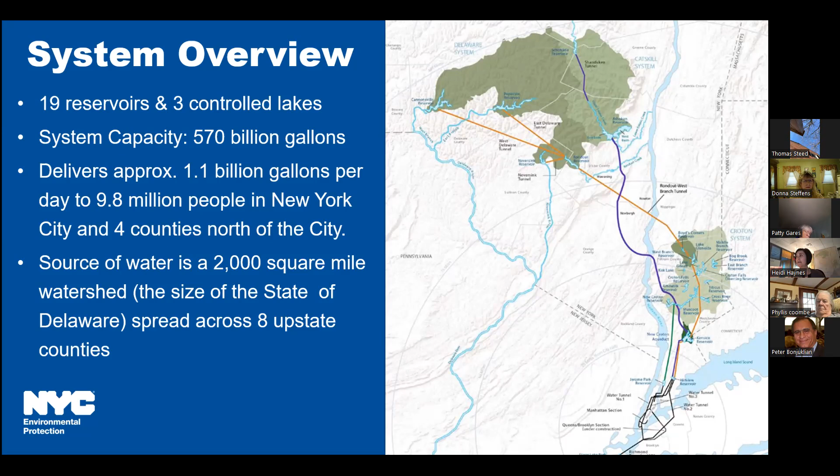The Delaware Aqueduct, which is what we're going to discuss today, is 85 miles long. It runs from the Rondout Reservoir all the way down to Hillview Reservoir in Yonkers. It is the longest tunnel in the world. It conveys about 50% of New York City's drinking water.

The Delaware Aqueduct was put into service in 1944, and it was last fully drained and inspected between 1957 and 1958. So it's been a really long time since it's been taken out of service. And obviously, it's a critical system component. It consists of 3 different segments.

So can everyone see my cursor here? I'm pretty sure you can. The Rondout, so we have the Rondout to West Branch. Don't see your screen, Heidi. You don't see my screen? No. Donna, are you able to see it? It says I'm sharing. Yes, I can see your screen. Sorry to bother you. No worries.

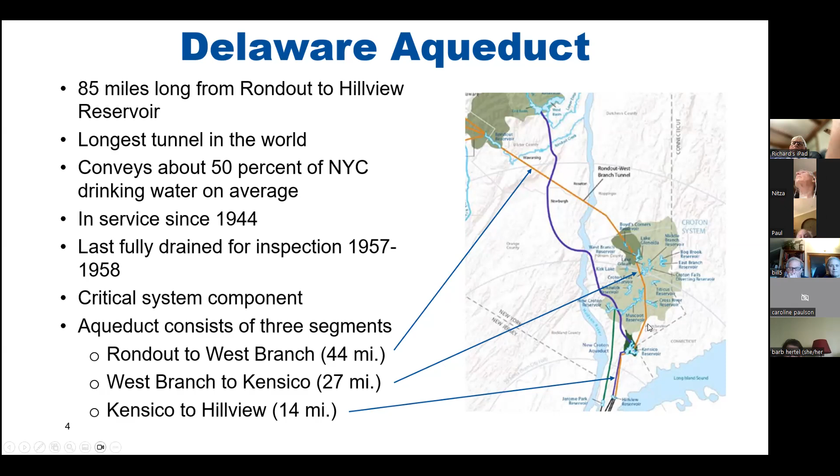Okay, so we have the Rondout to West Branch segment. Then we have the West Branch, sorry, there's a train here, West Branch to Kensico, and then the Kensico to Hillview. So there's 3 different segments to the system.

Back in the early 1990s, Central Hudson discovered a bubbling surface expression near their site along the Hudson River. There was also another leak identified in 1992 in the town of Wawarsing in Ulster County. Between both the leaks, it is estimated that approximately 30 million gallons of water is leaking out of the tunnel per day. That number is dependent on what the flow is going through the tunnel. So the more water we're pushing through the tunnel, the higher the leak is going to be. The less flow through the tunnel, the less the leak is going to be.

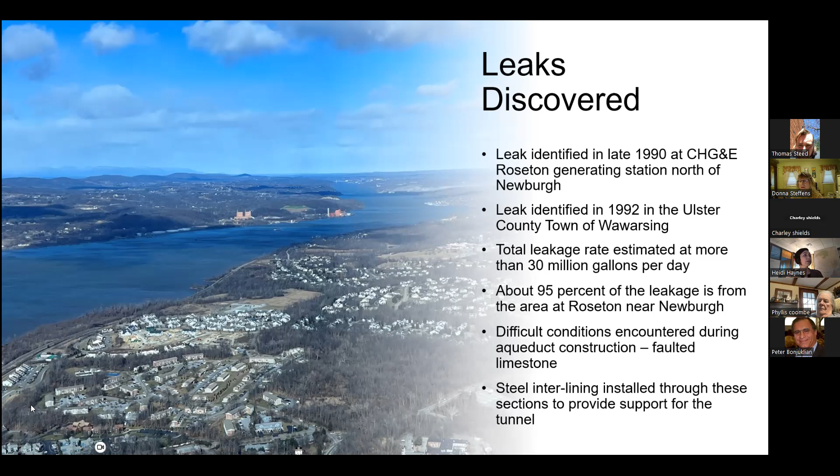Approximately 95% of the leak is in the area of Roseton and Newburgh. The leak in Wawarsing is much smaller, and it's clearly taken DEP a very long time to get to this point, and we'll get to discussing that reason in a little bit. Let me just go back here.

So the reason for the leak itself was that when we first put in the Delaware Aqueduct back in the 1940s, we hit limestone. But the limestone was already a known issue. There's a steel interlining that was installed in part of the aqueduct, but we didn't extend it far enough. So when we got down there to that Hudson River section, it's said that it's a result of a shortage of steel due to World War II. So the portion that goes under the Hudson did not have a steel lining.

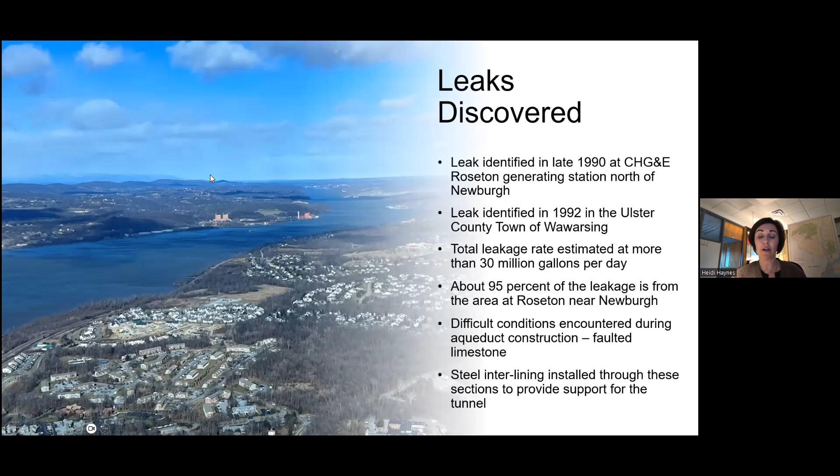So apparently, where we didn't extend it far enough, the limestone has started to erode the concrete, which caused the leaking in the aqueduct. The steel interlining is also going to play another component, a very critical component, as we install the new tunnel.

And so this slide shows all of the areas of concern that we're going to be discussing. As you can see, the leak in Wawarsing, as well as the section under the Hudson River here. This is where we've installed the new bypass line down there in the Roseton area. And this is where the surface expression was originally identified.

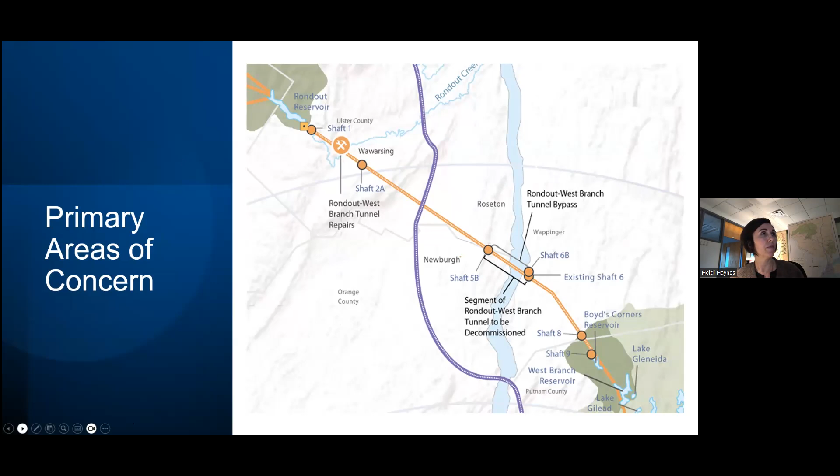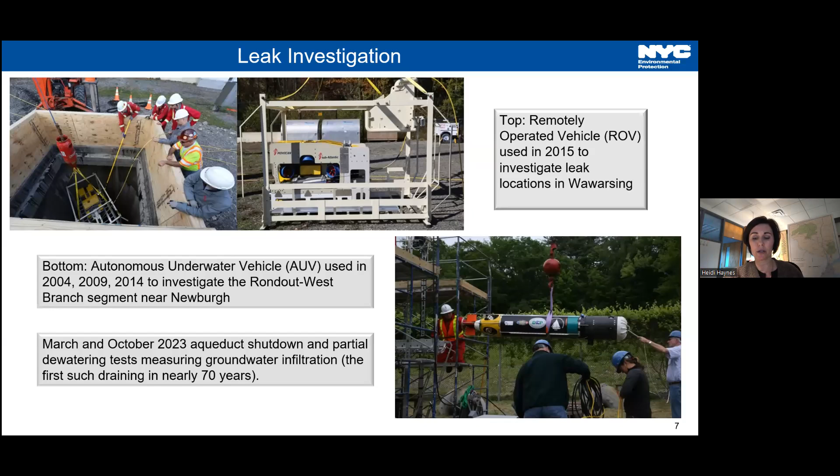So we've done an extensive investigation. These pictures are from the early 2000s through 2015. And although work was done prior to these photos, I just chose these because there are some good pictures. All right. That shows some of the work we've already done.

So what we did was we used ROVs and AUVs that look like mini torpedoes that have cameras on them. So these devices, we dropped them down into the shafts, down into the aqueduct while the water was still flowing. And we were able to take some really good 360-degree views just to see where the leak was and potentially how bad it was leaking.

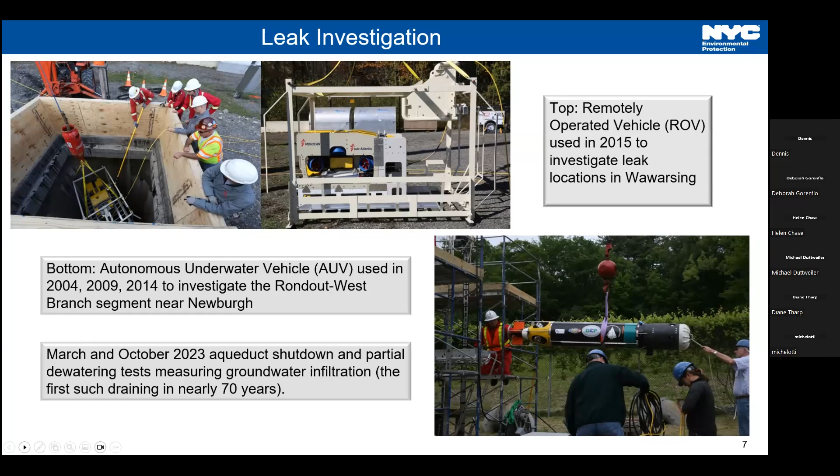So here we are with the solution. How do you fix this? So there were a lot of suggested solutions and a lot of investigative work that went into this. But ultimately, what was settled on was that we needed to put in a new bypass tunnel. The leak in Wawarsing wasn't as bad as the section that's underneath the Hudson.

When we shut down the aqueduct portion that's going under the Hudson, the leak in Wawarsing is going to be fixed at that time, and that leak only requires some grouting. It doesn't require replacement or anything like that. It's just some grout work to repair that leak.

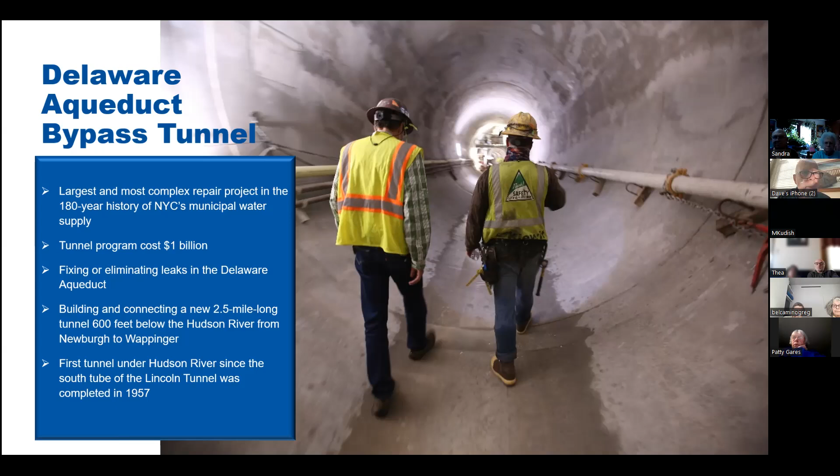This slide shows things in a little more detail. So like I said, the actual bypass tunnel is complete. We've already bored it. The shorter connections on each end need to be finished, and that's what needs to be completed.

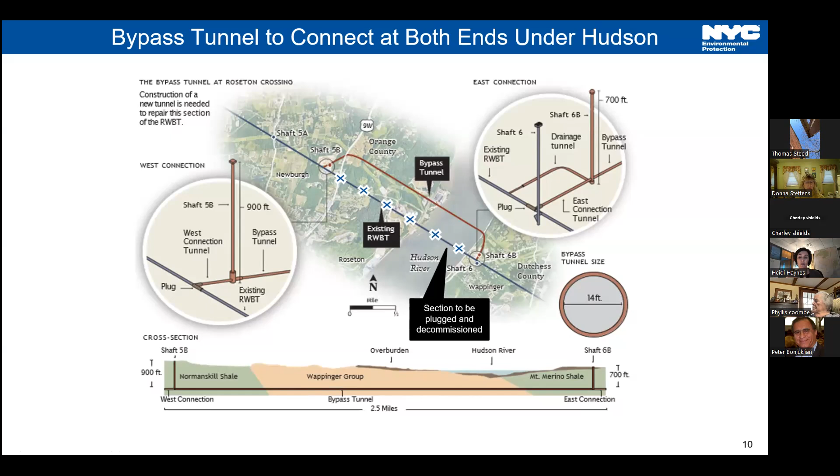The original section of the aqueduct needs to be taken out of service, so it cannot be running, and the pressure needs to be taken off that old aqueduct section, the whole aqueduct, as it's a pressure tunnel. In order for us to bore through it and make those final little elbow connections, the aqueduct has to be shut down. And currently our contractors are estimating for them to complete the work between 5 and 8 months.

The repairs were mostly complete in 2021, and now we're ready to make those two little final connections, and that final decision will come in June of this year. Once we make the decision to shut down, we will have to dewater and take the pressure off of the tunnel. We will attach those two other sections, and while it's shut down, we'll also be doing the grouting work in Wawarsing. We'll fix that leak there. And again, this is anticipated to take between 5 and 8 months.

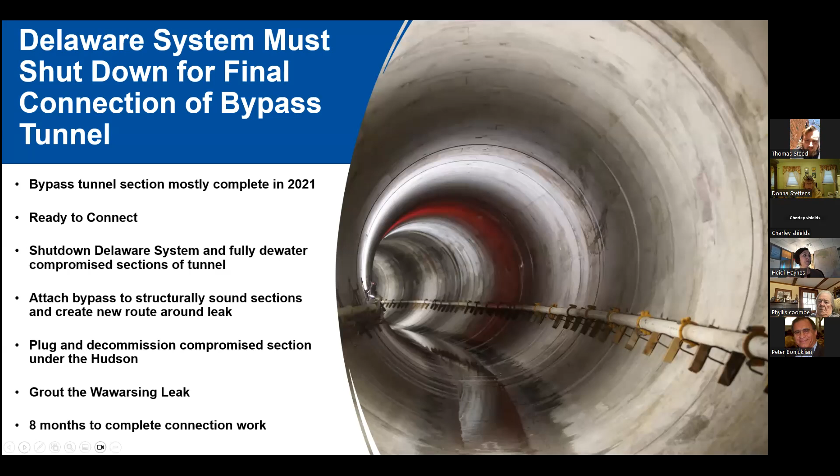So how did we get to today? The system's water supply management plan during the shutdown operations has been nearly 20 years in the making. There have been a lot of conservation measures implemented in this city to promote lower demand, lower usage of water, so that we can use the other two parts of the system, the Catskill and the Croton system, to meet the demand during the shutdown. There's many precursor capital projects that needed completion, including a $200 million repair and rehabilitation of the Catskill Aqueduct.

We also have our community customer water supplies. So there's a lot of people who rely on the water besides New York City. Anywhere that we have infrastructure in the counties besides Dutchess County, by law, those communities are allowed to tap into the New York system and buy water from us at a wholesale rate. If we shut down the Delaware Aqueduct and it's those communities' primary water source, we need to make sure that those communities can still get water for the 5 to 8 month period.

So there's been a lot of work that's gone into making sure that they're ready for the shutdown. We placed hundreds of interconnected and satellite-linked ground movement monitors at primary leak sites, and we were monitoring residential wells that could potentially be impacted by leak-influenced aquifers in Newburgh.

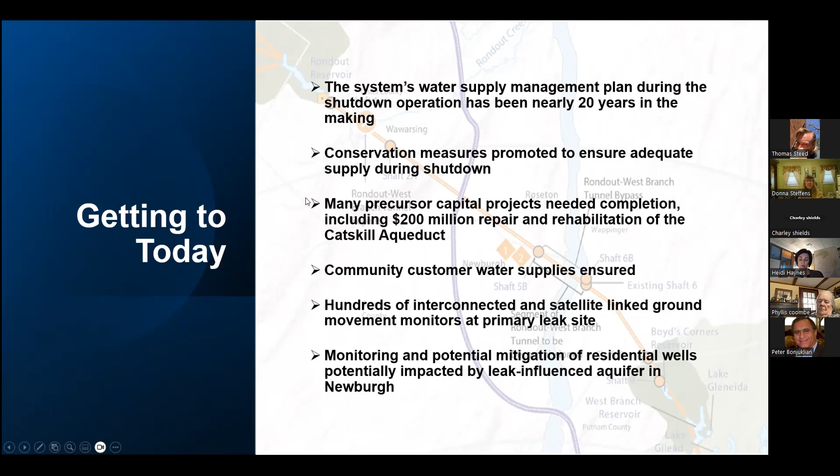I also just want to make sure that everyone is aware that there was a shutdown management plan that was subject to a full environmental review pursuant to the State Environmental Quality Review Act and the SEQR process, which also included a public process. That was included in all of the plans and all of the designs and operations going into this.

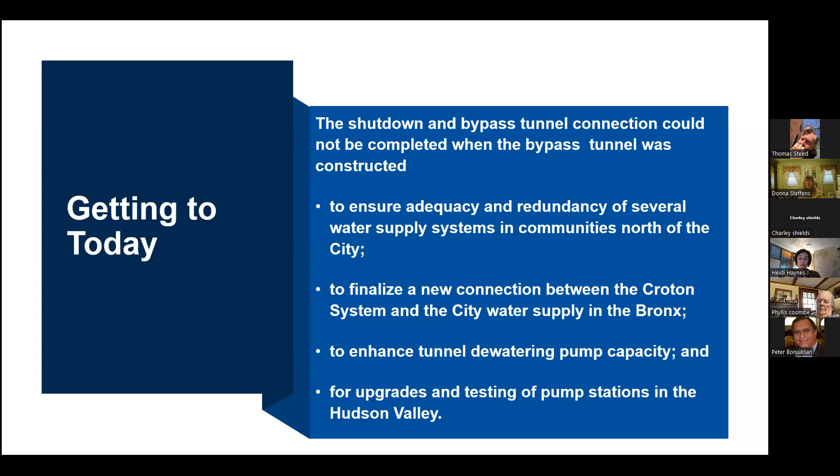Getting to today. The shutdown and bypass tunnel connection could not be completed when the tunnel was constructed, and it was delayed in '22, '23, and is scheduled for October 1st this year. It is to ensure adequacy and redundancy of supplies for the communities north of the city, and to finalize a new connection between the Croton system and the city water supply system in the Bronx. We also had to do some upgrading to our pumping stations in the Hudson Valley, at Croton Falls and Cross River.

So this is a list of all of the names of the projects that needed to be completed before we were able to do the shutdown. These are all capital construction projects, which entail contracts and a very long bureaucratic process that facilitates them. I'm not going to go through all of the projects, but just know that there's been a lot of work that's gone into the last 20 years. We haven't just been sitting idly by waiting to get this done. A lot of work has already been completed. That $1 billion number does not include the money that went into all of these precursory projects.

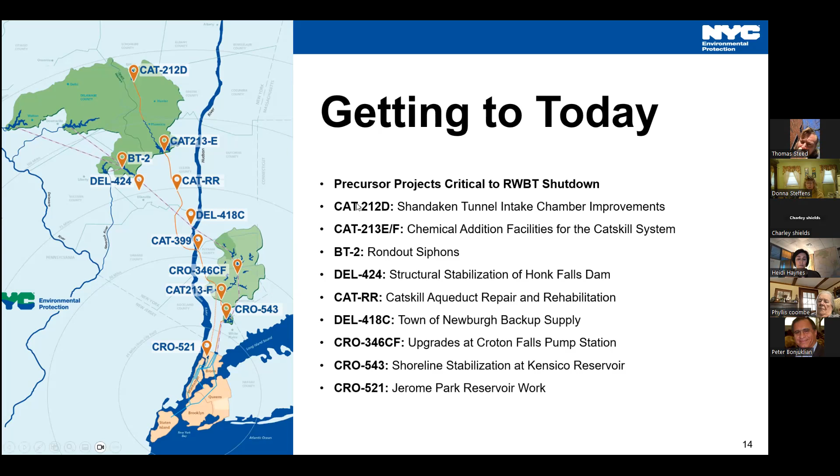Again, the shutdown management plan was a very extensive process. It took us a few years to complete. We had to do investigations to figure out where the leaks were coming from. We had to come up with a solution on how to design a new tunnel. We had to do the designs for it. We had to go through the SEQR process. Then we had to figure out how we were going to operate the system while we were shut down.

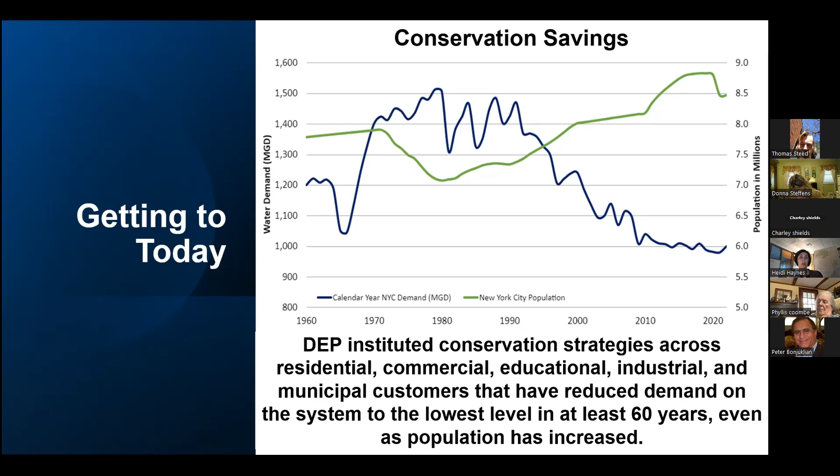Let's look into how operations are going to be with the shutdown management plan. The purpose behind the shutdown management plan was to provide the operations of the system. However, during the shutdown itself, the goal is to provide uninterrupted, high-quality water to DEP's customers. I understand that north of the city, there are concerns that include flooding and fisheries, and we'll get to some of those concerns as well.

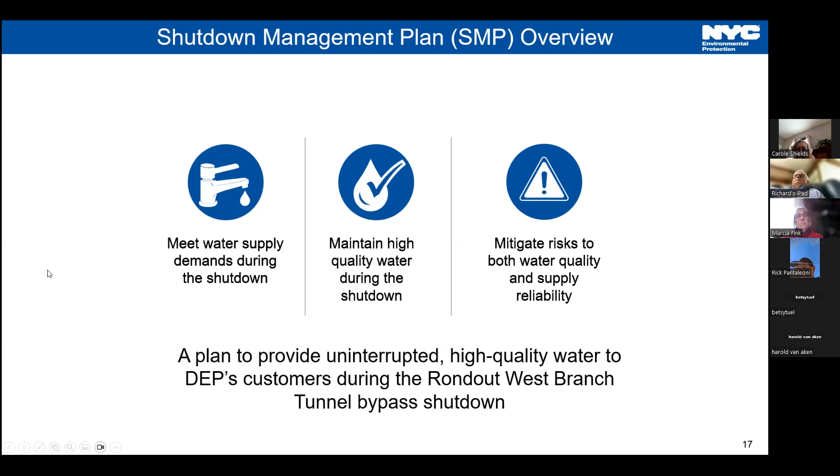This is the water supply augmentation. I think one of the biggest questions is that if we're going to take the Delaware Aqueduct out of service, how does New York City plan to get its water for 5 to 8 months while half of the supply is out? So we did a big project called the CAT R&R to rehabilitate the Catskill Aqueduct to restore service. This included sending people into the aqueduct with squeegees to remove biofilm off the walls of the aqueduct to improve capacity. We anticipate 600 million gallons per day out of the Catskill system.

We've done several max flow tests, and we feel we can increase that flow if needed. The 2 pumping stations at Cross River and Croton Falls are part of the Croton system. Since the Delaware system is going to be removed from service between the Rondout West Branch section, there remains a branch that will go from West Branch to Kensico. These 2 pumping stations have the ability to take Croton water and pump it into the Delaware Aqueduct below the West Branch and send it into Kensico.

This allows us to take more water out of the Croton system than we normally have. These 2 pumping stations have always existed as part of our drought management plan for years. They got big upgrades leading to this shutdown. This was one of the predecessor projects, and this was necessary so that we could maximize the use of the Croton system. The Croton filtration plant is up and running, and it can maximize out at about 290 million gallons per day. We are expecting to utilize that during the shutdown.

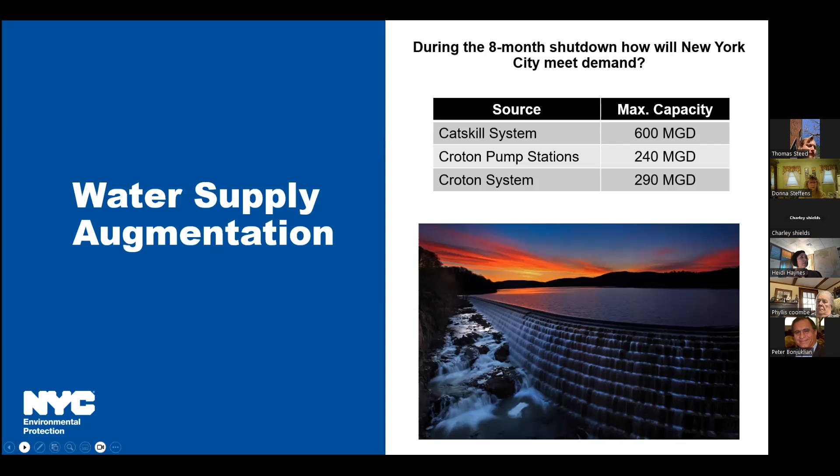So now we're getting to the point once again where we're gearing up to make a decision to move forward with the shutdown. We need to be able to tell our contractors, yes, gear up and mobilize everybody, get them to the site. Let's get prepped and ready to go for October 1st. So what is going to lead us to making that decision? Water supply hydrologic conditions, infrastructure conditions, and having everything in working order.

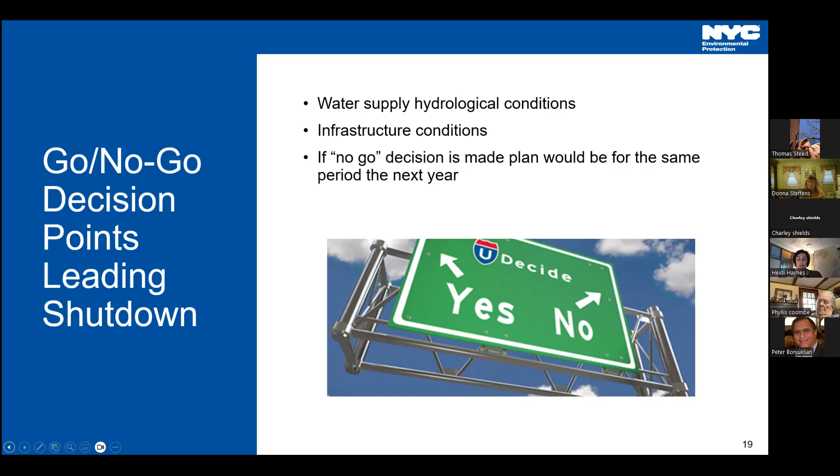If, for whatever reason, we are not seeing those things come together, the decision will be no-go for this year, and the shutdown will be delayed once again to the same time frame next year. The reason for the October to May time frame is that it's the lowest demand period in the winter time, whereas in the summertime, the demand for water is much higher.

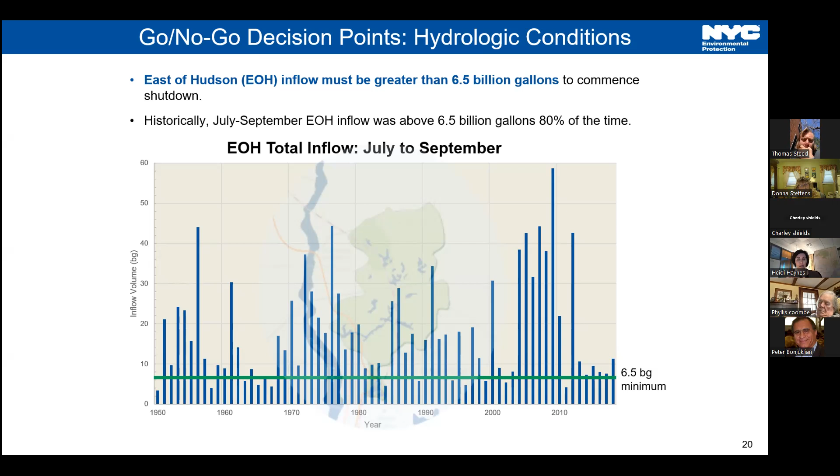So this slide, I understand, has some predictions from 2023. I'm only using this slide as an example, and as we go forward, this information will upgrade. We use a lot of tools in this process. Weather forecasting, we take a look at it long-term, short-term, seasonally, and annually. There are a lot of different intervals in these products and in what they put out. Our partners at the National Weather Service in NOAA.

We will continue to utilize these tools as we do for our normal daily operations. We will be bringing in more forecasting tools. We've brought them in over the last year, and we're also using IBM Weather Underground. Columbia University is also helping us with weather prediction so that we have more tools in our toolkit, even more than ever before. We've been testing them out over the past few years to see how well they can interpret information that is going to be used for the operations.

I know that one of the biggest questions you have is, what if something happens during the shutdown? That question is really dependent on where we are in the process. There are different phases of construction that will hit during the shutdown. We will be having a meeting every single day, every morning, probably at 8 a.m., just like we've done for all of the predecessor projects, explaining what the conditions are and whether we are still a go, no-go, and what our current bailout time is.

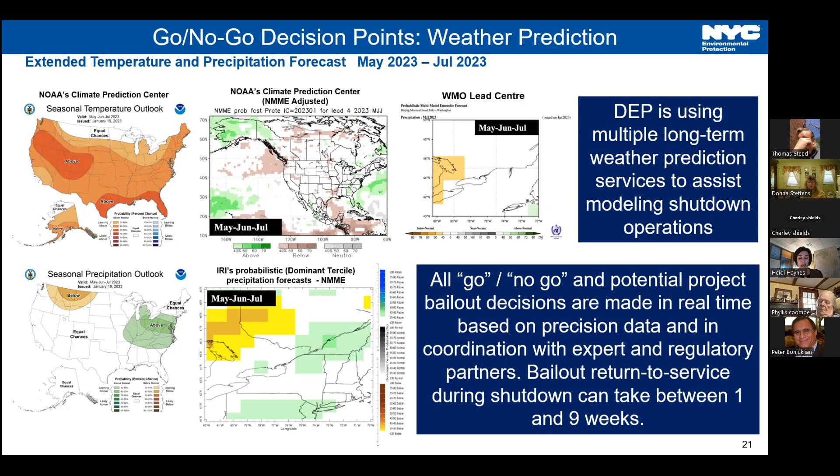The bailout time is how long it would take for us to return the Delaware Aqueduct back into service. And that time really varies depending on where we are in the construction process. The bailout time could be anywhere from 1 to 9 weeks to be able to turn the aqueduct back on. Every day, the bailout time changes, and that's one of the biggest things we track operationally: the bailout time and how long it will take to place the aqueduct back into service.

There are 2 pumping stations, the Catskill Aqueduct and the Croton water filtration plant. These things need to be working. They need to be running at max capacity. If we do not have that running, we cannot meet city demand and we cannot support some of the upstate communities. We will be working around the clock at a majority of these facilities. Our water supply center in Grahamsville is up and running 24/7 with alarms throughout the entire system, monitoring things very closely.

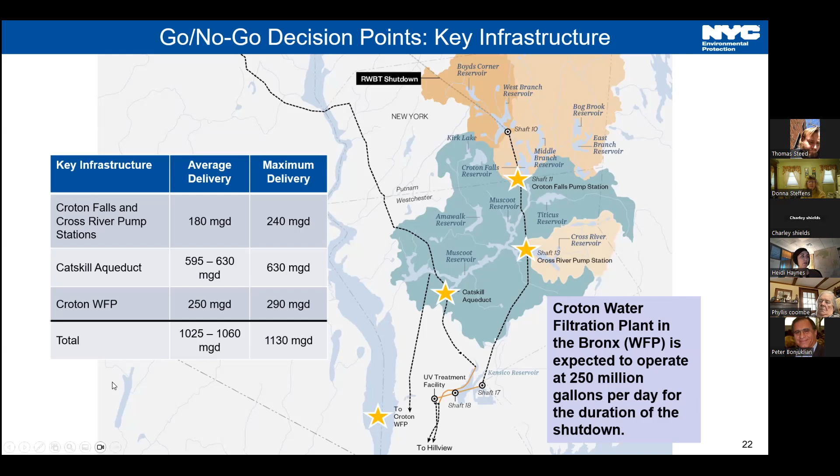In March of 2023, the DEP shut down the Delaware Aqueduct and drained the tunnel to an elevation of -90 feet below sea level to perform critical infrastructure and hydrological tests, the first such draining in nearly 70 years. An initial analysis from the shutdown showed potential groundwater infiltration into the tunnel at higher levels than originally anticipated. The DEP postponed the final bypass tunnel connection project by 12 months to augment construction site pumping capacity.

Subsequent draining tests done in October of 2023 to -250 feet below sea level found infiltration subsided in a longer drawdown, with final infiltration rates closer to the original design plans.

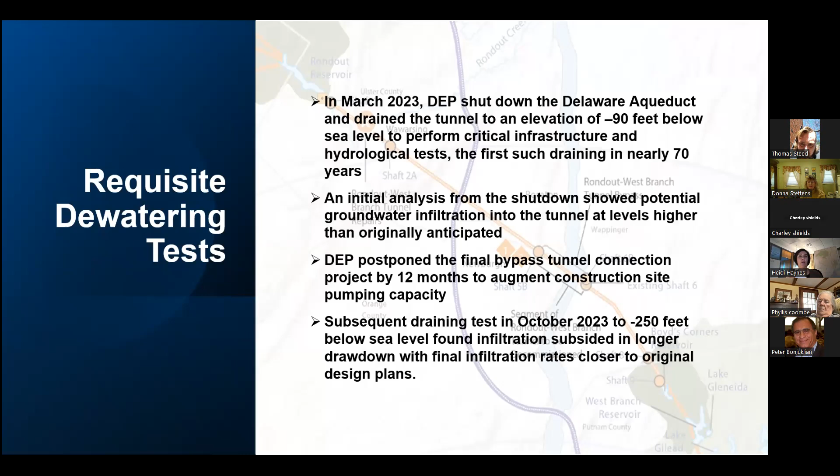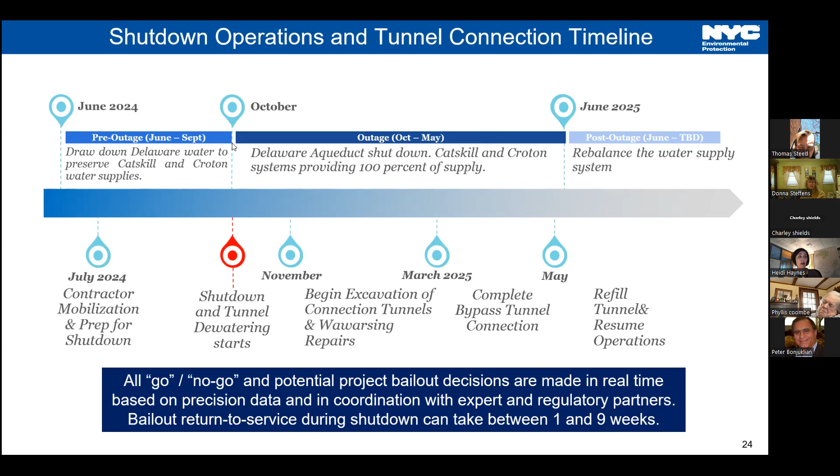After the construction is complete, we need to do a rebalance to the water supply system. What does this mean? Normally, when we operate the system, we strive to draw the reservoirs down in a manner where they all have the same chances of refilling on June 1st. All the reservoirs are different shapes and sizes. They have different release capacities. They have different diversion capacities. That is why we do this by percentage. Our goal is to have them all filled by June 1st going into the summer, which is the highest demand season. The reservoirs get drawn down from there as we start using the water.

We want to make sure, for example, that if we're going to start drawing down the Delaware system for this year for June 1st, we need to bring it down as far as we can before the shutdown in October. This is not normal operations for us. Typically, we would follow a pattern laid out in the flexible flow management program, where we would not be able to go below 85% unless really dry. On a typical year, we strive to hit storage targets.

However, we are going to work to bring the Delaware system down as much as we can, and we're really going to keep the Catskill and the Croton systems as full as we can. They will not be 100% full because even if we are hitting the Delaware system hard, we still have to use the Catskill and the Croton system a little bit to meet demand. During the shutdown, the Delaware system will start to fill back up. We will start making the releases. We won't be diverting any water, so we won't be using as much water. We're going to be utilizing the Catskill and the Croton systems fairly hard.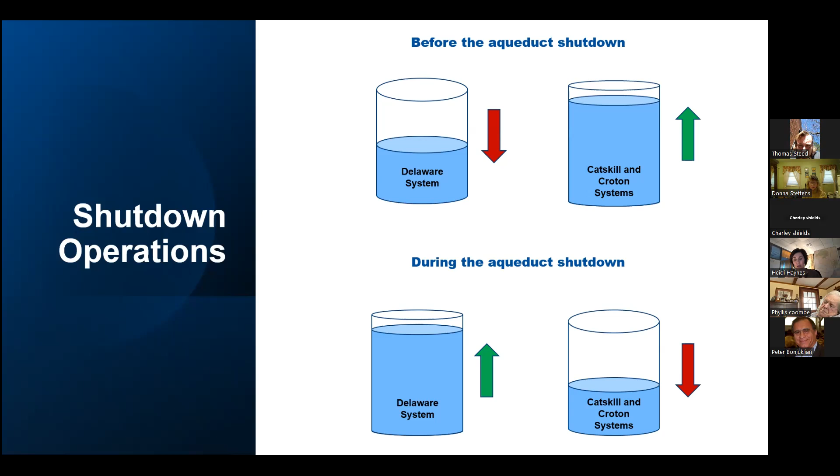Once the construction is complete, we are going to have to let the Catskill and the Croton system come back up to the point where we'll be using the Delaware system fairly hard to rebalance the whole system. Depending on what hydrologic conditions look like, if it's normal conditions, if it's wet, if it's dry, there's a range to what all of those possibilities could look like. Again, all of these decisions are made in real time and all based off hydrologic conditions.

I'm going to walk you through a series of graphs that are repeated with the same colors for the entire system. This gold line here is the average surface level over a 63-year modeling period under normal conditions. This is the average surface level for 63 years' worth of hydrologic records in the system. The blue line is what's modeled for the shutdown based on an average year with normal precipitation. And the yellow shaded background is the surface level operating range that we've seen over the last 63 years, the highs and the lows that we've seen during all types of conditions.

The DEP doesn't have a crystal ball, but we do have advanced modeling and forecasting tools. Our models are validated by the National Academies of Sciences, Engineering, and Medicine and are called the most complex and advanced tools of its kind in the world. That report is available on our website for you to take a look at. Our tools have been validated.

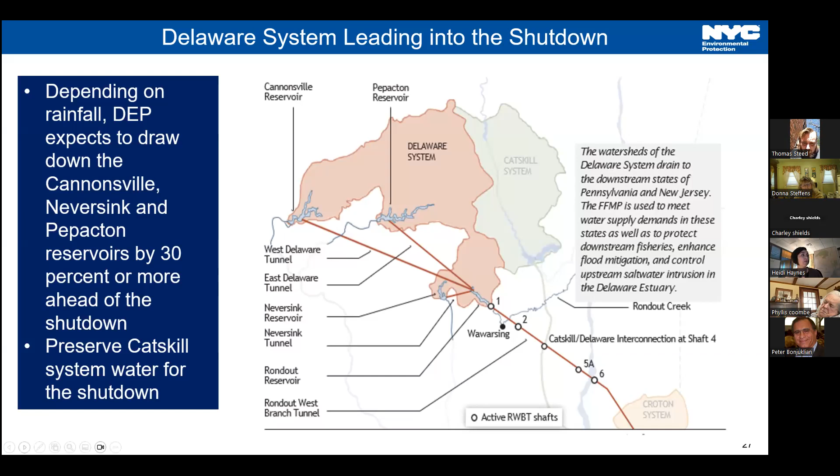Prior to the shutdown, the Cannonsville, Pepacton, and Neversink will be drawn down, leaving a substantial void for refill and spill attenuation. During system shutdown operations, releases from each of those reservoirs into the Delaware River tributaries will continue pursuant to the flexible flow management program.

The gold line for the Pepacton is what the average condition would look like using the 63 years of records. The blue line is what we're expected to see the Pepacton look like during the shutdown, which is really not that far off from normal operations. The normal storage target is 85%, so we'll still be below that.

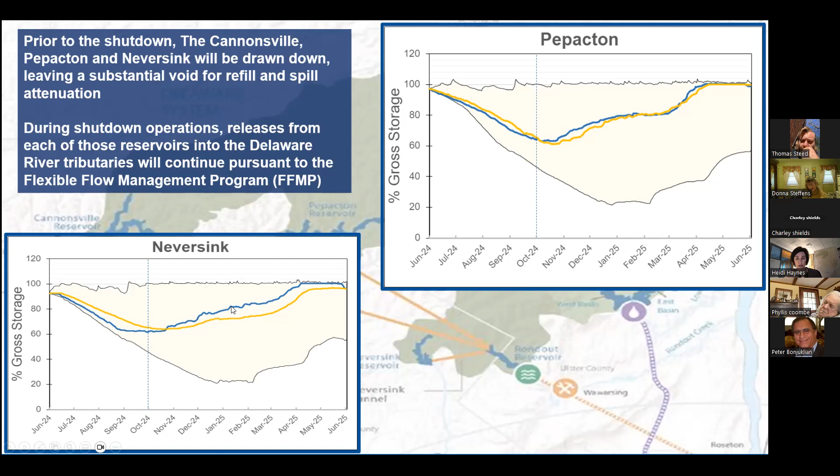The Neversink has the smallest release works out of the Pepacton and Cannonsville reservoirs. However, we are still able to manage it. The gold line is what you would see during an average year, and the blue line is what you will see during the shutdown.

Moving along to the Rondout and the Cannonsville. Cannonsville has the biggest release works out of all of the reservoirs, and we're anticipating being able to get the level down to about 60% going into the shutdown.

The gold line is the normal operations, but because the release works are so big, even in a wet year, we anticipate being able to hold Cannonsville's levels down during the shutdown while being able to refill it come the new water year.

During the Delaware Aqueduct shutdown, three new temporary siphons will be used to help manage the Rondout Reservoir's surface elevation by enabling the release of as much as 260 million gallons per day. That's similar to the flow of a small creek into the Rondout Creek. Siphons cease operations within 1 foot of flood action stage on the Rondout Creek.

The Neversink, Pepacton, and Cannonsville reservoirs all feed the Rondout Reservoir. The Rondout doesn't have a very big watershed of its own. It only has a yield of about 100 million gallons per day, so it doesn't have a lot of water necessarily feeding this reservoir for the size of it because the Neversink, Pepacton, and Cannonsville all feed it. It was designed that way.

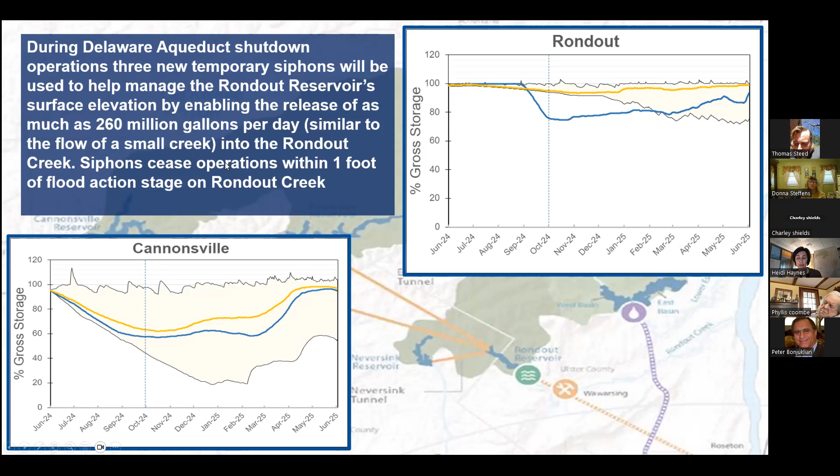But because there was no other way to evacuate water out of the Rondout while the Delaware was shut down, Rondout needed siphons so that we could maintain the community releases downstream and provide ourselves with a way to evacuate water in the event that we did have a larger storm and we need to drain more water out of that reservoir. That is why Rondout is the only reservoir out of the Delaware system to get siphons.

Delaware System recreational uses. Permitted boating and fishing activities from shore or boat will be permitted during the shutdown on all reservoirs. Some of the levels may be lower, but we're not putting any restrictions on the Delaware reservoirs. There are also no restrictions on land-based activities.

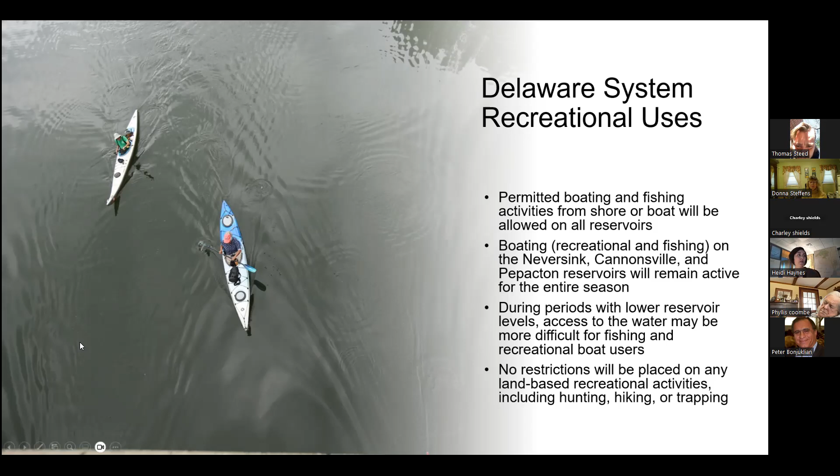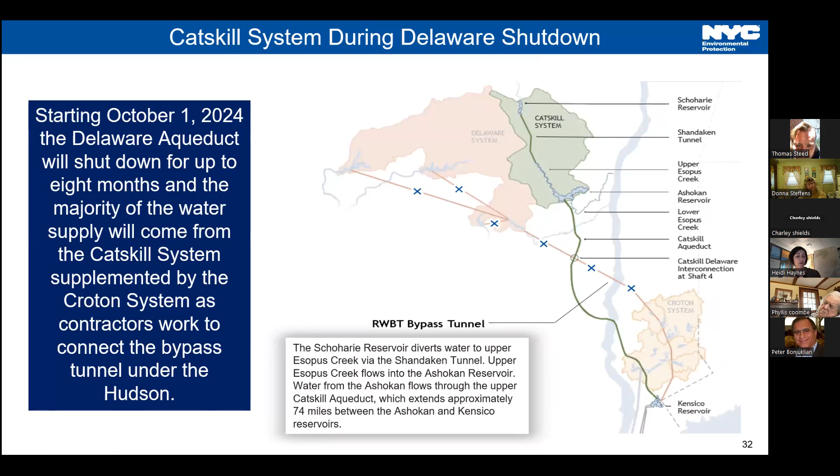Moving along to the rest of the system and what you can expect the Catskill to look like. East Ashokan and West Ashokan. The Ashokan has is a two-basin reservoir, the West Basin and the East Basin.

We manage these concurrently. The gold line is the level you'll see during an average year over the past 63 years. The blue line is what is modeled for the shutdown. The Ashokan is going to get utilized more during the Delaware Aqueduct shutdown.

Releases to the lower Esopus Creek leading up to and during the Delaware Aqueduct shutdown will continue pursuant to the interim release protocol, and DEP anticipates operating the Ashokan pursuant to the conditional seasonal storage objective of maintaining a 10% void after October 1st.

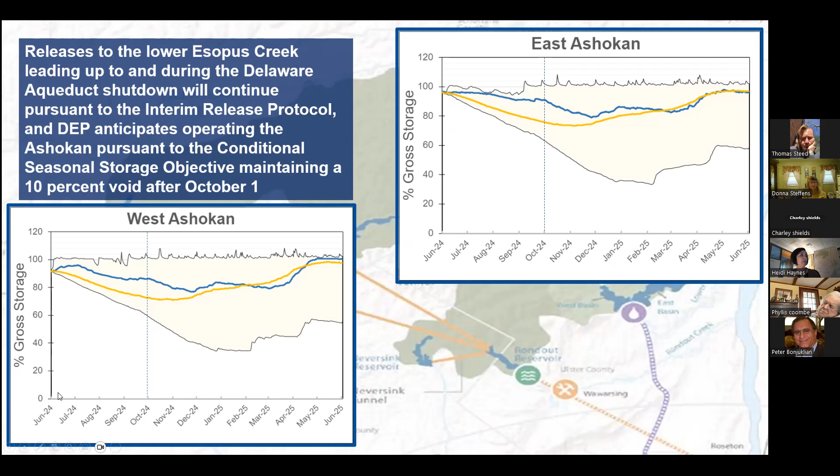Moving along to the Schoharie. The Schoharie Reservoir feeds into the Ashokan Reservoir. The Schoharie will be drawn down to use water for the Ashokan and to ensure that the Ashokan is full.

The diversions from the Schoharie Reservoir are made through the Shandaken Tunnel to the Upper Esopus and are expected to continue.

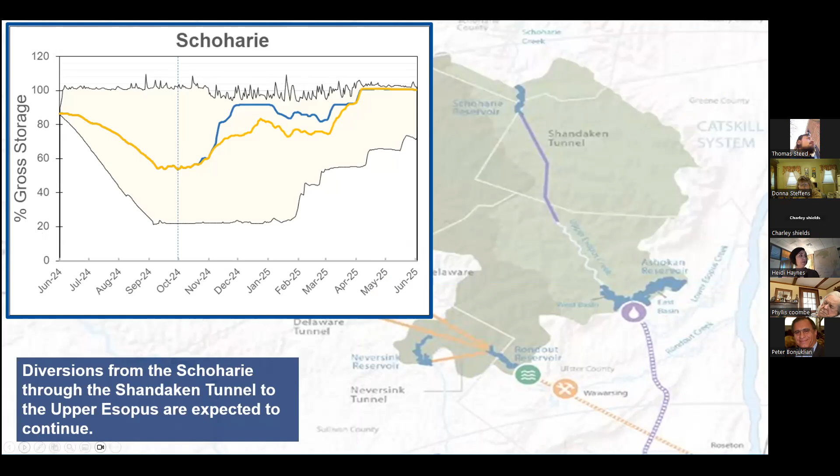The Catskill system, this is the same waterfowl management system that we discussed earlier, and it will be implemented for the Catskill system. There will be no restrictions placed on the Catskill system for recreation during the shutdown.

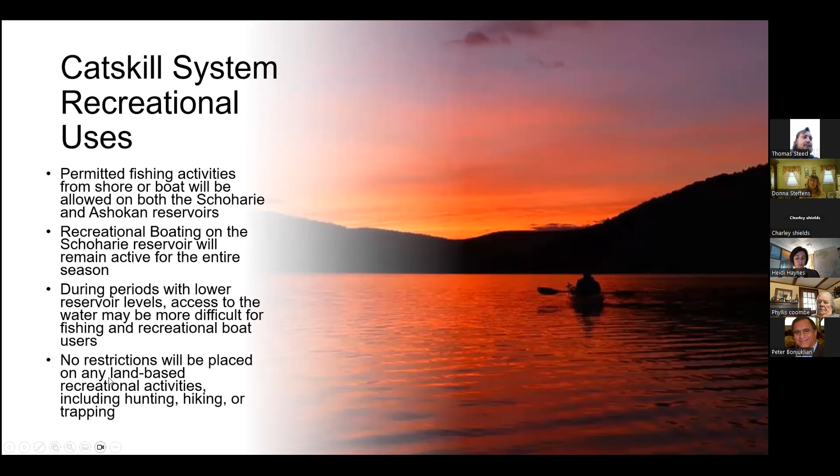Outage operations for the Croton system. So we'll move along to the Croton system. Some of the biggest changes system-wide are going to be seen in the Croton system.

The Croton system hadn't been used for about 20 years while we were building the filtration plant and has been used more regularly since it came on in 2015. It hasn't been used as hard as it's about to get used now.

The Croton system is the oldest watershed in the city's water supply system. It will be tapped at full capacity during the Delaware Shutdown period and treated as 4 separate subsystems.

Additionally, pump stations will be supplemented. Pump stations will supplement water into the Delaware Aqueduct.

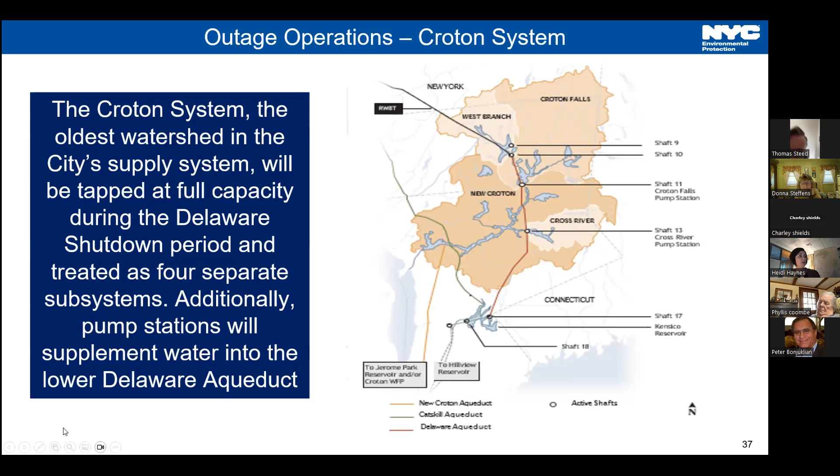These are the outage operations here. You can see all of the different reservoirs that make up the Croton system.

Some of these reservoirs are going to get very, very low. The reservoirs on the Croton side are much smaller than they are on the Catskill side, and a lot of them actually feed into each other.

Just like the Cannonsville, Pepacton, and Neversink all feed into the Rondout, all of these reservoirs over here that make up the Croton system all feed into each other. It's definitely a bit confusing of a system.

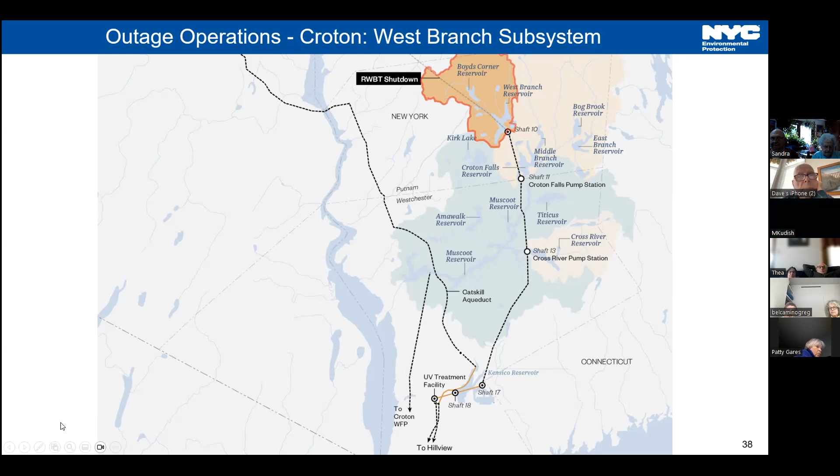So this is the West Branch and Boyd's Corners. West Branch and Boyd's Corners, the Rondout to West Branch is a section that is coming out of service for the Delaware Aqueduct that we've discussed.

Normally, the West Branch Reservoir can be used as part of the Delaware system. For the purposes of this shutdown, these reservoirs are going to be our backup reserves. We're going to hold storage in both the West Branch and Boyd's.

Boyd's feeds the West Branch. Boyd's water goes nowhere except into the West Branch. So this is going to be our reserve during the shutdown. That is why you're not seeing a lot of movement in these graph numbers here. This is what we're going to utilize in the event that we need water.

Moving down to Croton Falls.

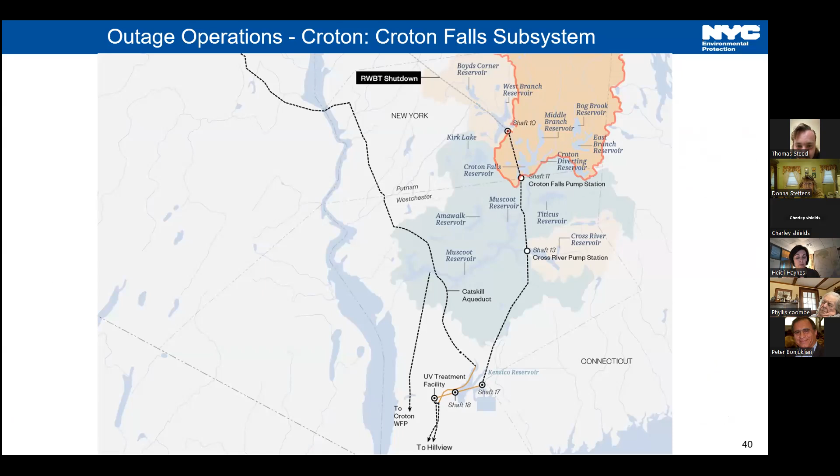There is the Croton Falls Reservoir and the Croton Falls Diverting Reservoir. Again, one feeds into the other, so there's going to be a lot of water moving from one to the other. This reservoir is going to come down to about 80% during the shutdown. These two reservoirs also feed down into the New Croton, so once again, these two reservoirs will get used more than normal.

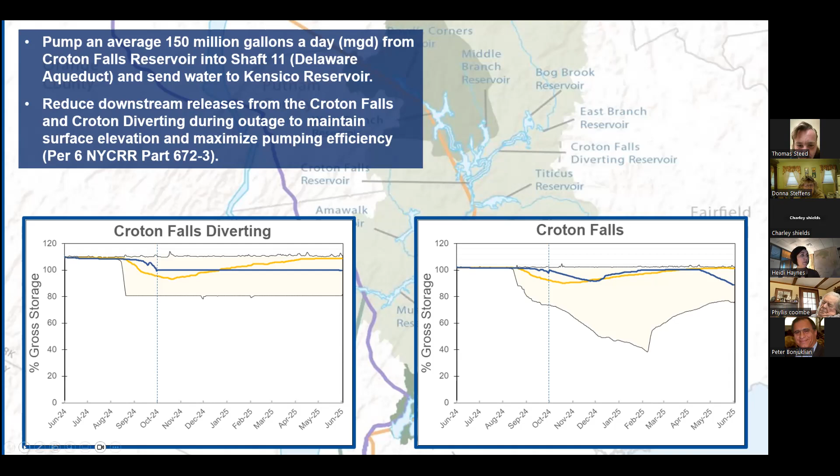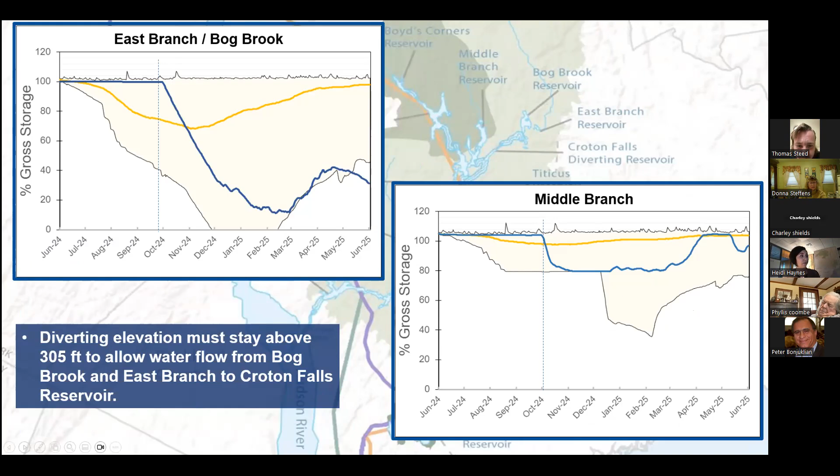Moving along to the Croton Cross River subsystem, Cross River and Titicus. Cross River is probably going to come down to about 60%. Titicus is going to come down to probably about 0.

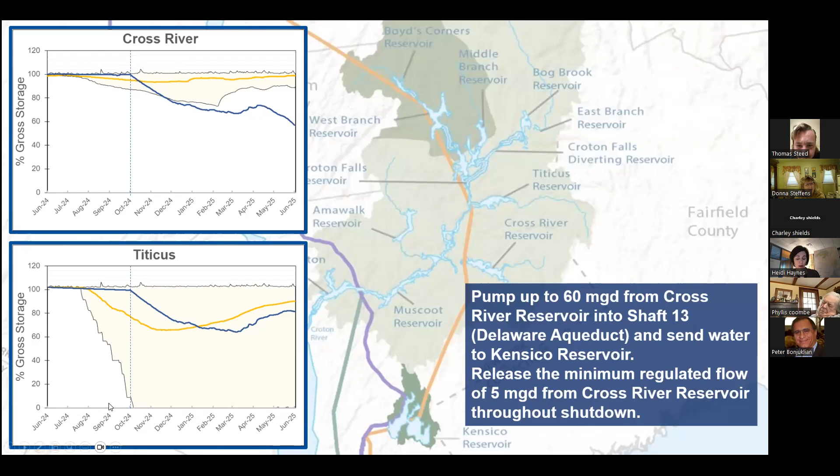Moving along to the New Croton subsystem, the Muscoot and the Amawalk. A lot of these smaller reservoirs feed into the Muscoot, and that is why you won't see a lot of change, because the reservoirs where you're seeing the biggest changes are just feeding the other reservoirs where the line is being held. The Amawalk will be drawn down to about 60%.

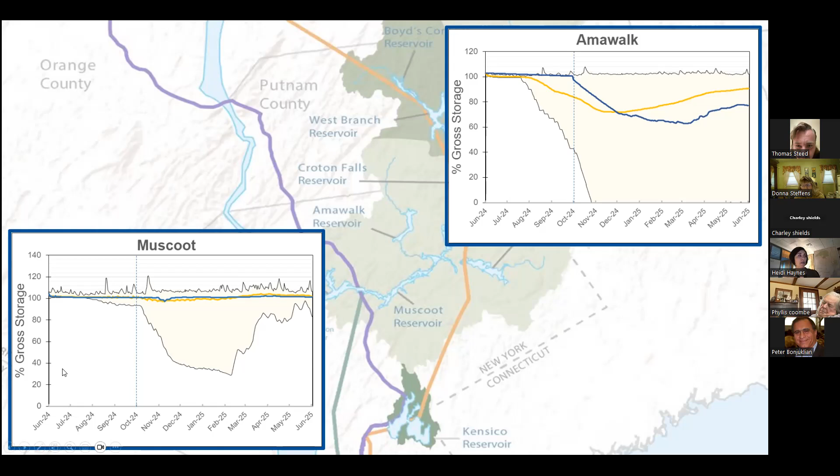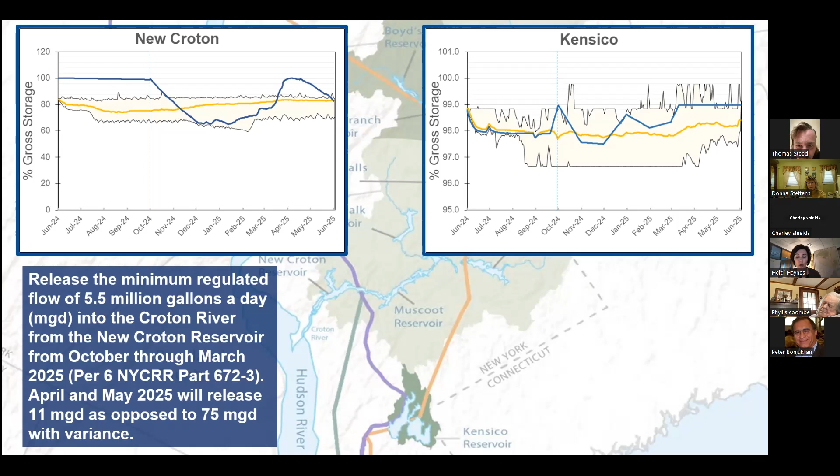New Croton is the last stop before all the water gets sent down to the Croton filtration plant. All the smaller reservoirs that you saw before make up the Croton system, and they all feed into the New Croton. You'll notice that the gold and the blue lines are all held steady here because the Catskill Aqueduct is going to be feeding the Kensico. These are our last two stops before the water is sent to either the Croton filtration plant or through the UV plant, then on to Hillview, which is our balancing reservoir in Yonkers, where it then enters the distribution system.

Croton system episodic taste and odor issues. One of the biggest challenges that we've had in recent years is episodic taste and odor issues in the Croton system. If you've ever noticed when it rains, sometimes you get that earthy, musty smell from the water hitting the dirt, you can kind of smell those days. Sometimes that's what these people's water tastes like. There are two organisms in the water called MIB and geosmin, and these have created taste and odor issues.

We realized that we were not the only people in the country to have this problem, so we worked with other partner utilities to figure out what we were doing and what we needed to do to mitigate taste and odor problems. So we had to change the filtration media at the plant, and we installed a granular activated carbon, which we call GAC. This type of carbon filters out the two organisms so that we don't have taste and odor issues.

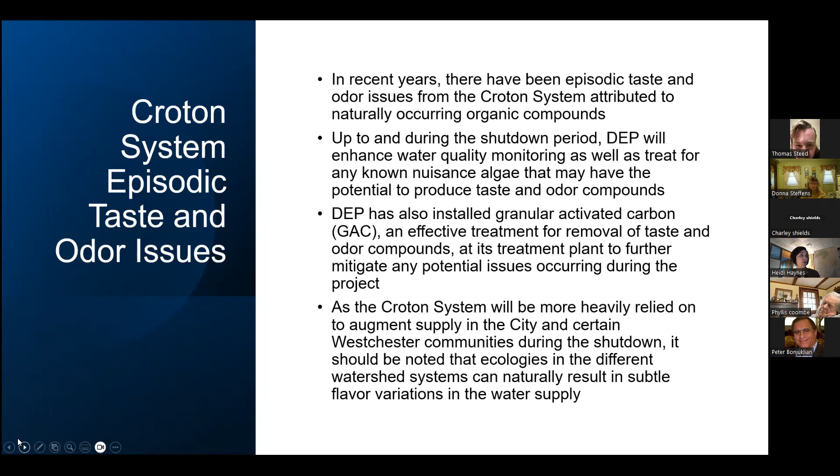Once again, there will be an expanded waterfowl management program, which is going to be really important, mostly for Kensico and Hillview. This program is going to be a bit more expanded, so we just wanted to make sure that people are aware, again, that you might see us out on the reservoir deterring birds.

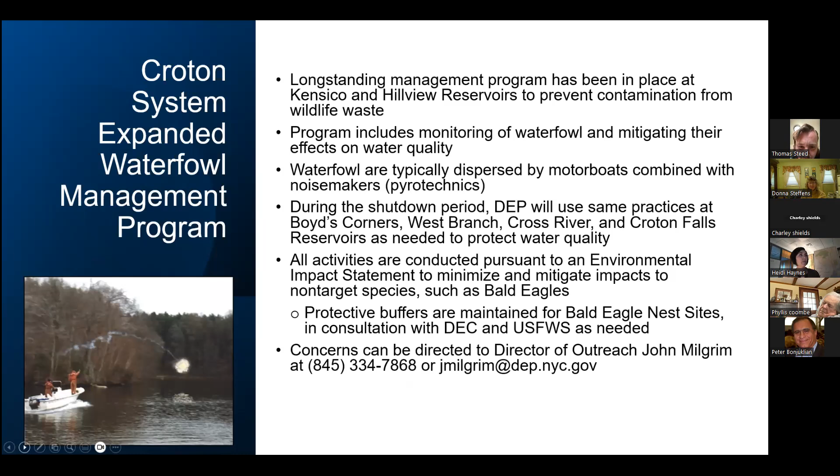Croton system recreational use. Recreation is going to be impacted a bit in this area. We'll still permit fishing activities from shore or boat until the storage is about 25% in all of the reservoirs, though, when it's going to not really be safe to drag a boat down there. So there are going to be times when fishing is going to be restricted. There will be no restrictions on land-based activities. The in-stream discharges, the releases that we make to feed other reservoirs, those will also be decreased, so we will have to rely on the Croton system.

We do not allow ice fishing on the west of Hudson reservoirs, but we do allow them on the east of Hudson reservoirs. Ice fishing, however, is going to be fully restricted during the winter east of Hudson, because when you're draining that much water, and possibly draining it fast, in some cases you can get ice buildup with gaps that make it unsafe for you to be out there. So we will be restricting ice fishing for the 2024-2025 season.

We will continually post updates, though, on our DEP website regarding these changes.

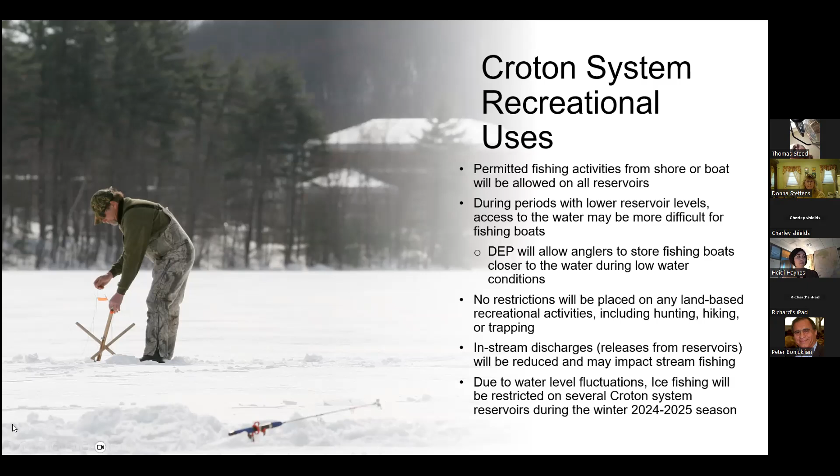And I know this has been a lot of information, okay? This project has been more than 20 years in the making. There have been a lot of predecessor projects, a lot of environmental reviews, a lot of planning, people, oversight, and regulations, as well from the state and the federal government in order to get to this point.

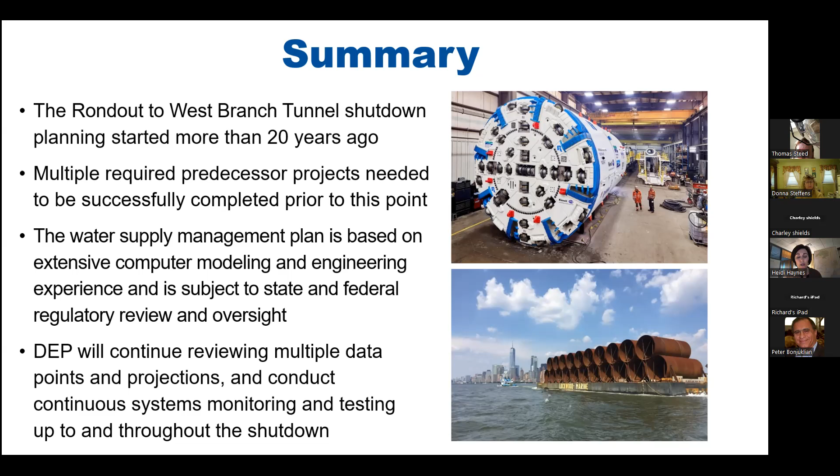The water supply management plan is based on really extensive computer modeling. We did the EIS back in 2015. We updated the modeling and continue to look at it daily. There's a big team who work behind the scenes on reservoir operations to help make this shutdown not even noticeable. And again, the goal is to be able to get through this shutdown without any issues.